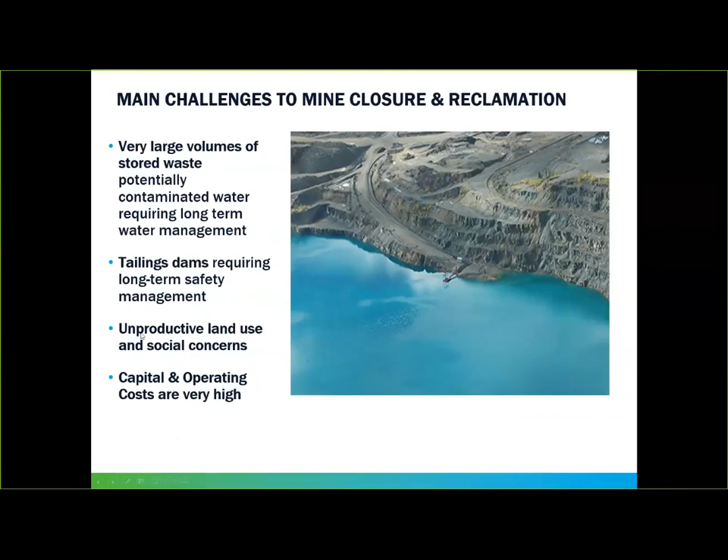As an example of such challenges is the Faro mine in the Yukon Territory in Canada, which Jamie Kars will speak to. It's a large mine built and managed in the standard of the 80s, which produced lead and zinc. It was not built for closure, and now many upgrades are needed to all the mine infrastructure, including upgrading the tailings dams, diversions to meet seismic and hydraulic standards.

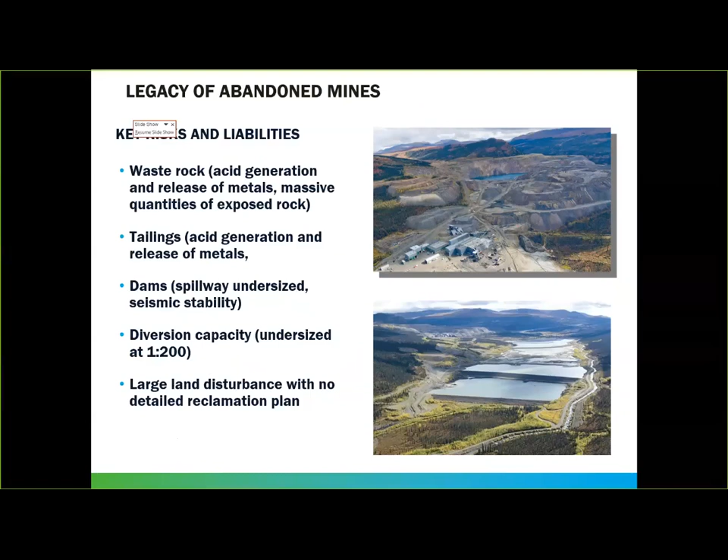And the tailings and waste rock that generate tremendous contamination in the water courses. The mined-out pit walls are unstable, and combined with the waste rock, the tailings areas take up an extensive part of the land area and valleys.

So recently, there's been some effort to provide guidance for the management of mine closure for industry and governments. Most significantly, the International Council on Mining and Metals, ICMM, which is a mining industry association, has generated useful guidelines and tools to support proper closure, including best practices in stakeholder engagement and social closure.

The International Standards Organization, ISO, is nearing completion of the Mine Closure and Reclamation Planning Standard and has accompanying technical guideline manual to support that standard.

The International Committee on Large Dams, ICOLD, and the Canadian Dam Association, CDA, are excellent tools for designing and managing dam safety and are internationally recognized standards. They provide hydraulic and seismic design guidelines based on risk to population, the environment, and critical infrastructure.

The common theme for proper mine closure starts with the main objectives that are set for the project, which would lead to the development of specific criteria in assessing and remediating for physical and chemical stability, as well as post-mining land use. These objectives typically involve the notion that public should always be safe from physical hazards on-site, including dams, slopes, mine openings, and other infrastructure.

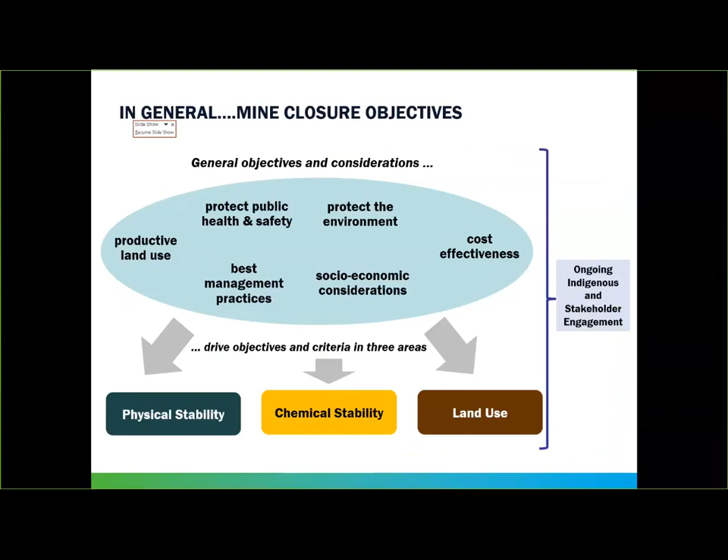Commonly, it is expected that after the completion of the closure project, most of the land should be left in a form which permits future uses such as wildlife, farming, recreational, or industrial development. The formation and buy-in to these objectives needs to be done with stakeholders and right holders to ensure success.

I will talk briefly about the key physical risks that are the drivers for safety and environmental concerns. Tailings ponds are structurally the most significant risk. Many were built before real design standards were developed or were built with the mine operations design life as compared to a closure design life.

Design considerations include maximum seismic stability, which would provide robust design requirements. Spillways need to be able to pass anticipated maximum predicted flows. Diversions need to be designed to pass those same flows. Stability of underground working, stopes, adits, shafts, and portals and pit walls are a significant safety and land use concern.

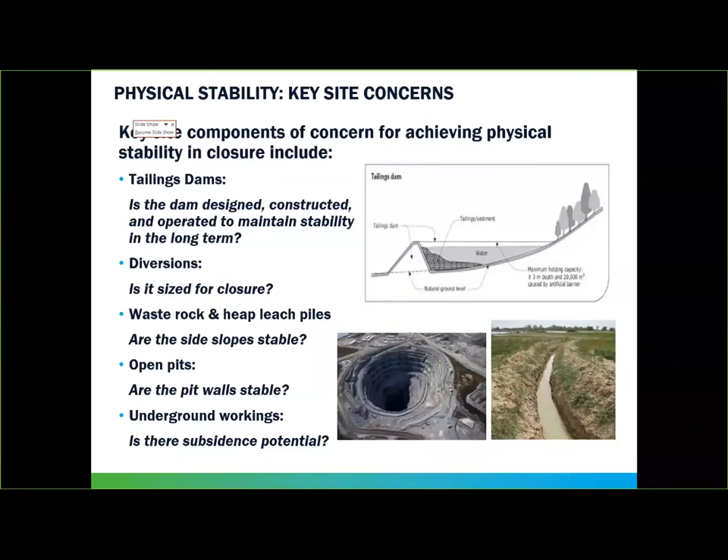Another quick word on tailings dams. Many dams have been and continue to be built on tailings as foundation, primarily due to lower construction costs and lower impact on operation schedule. The standard on this is changing, however, in favor of more stable and robust design approaches, such as centerline or downstream construction lifts. This can be a major cost item.

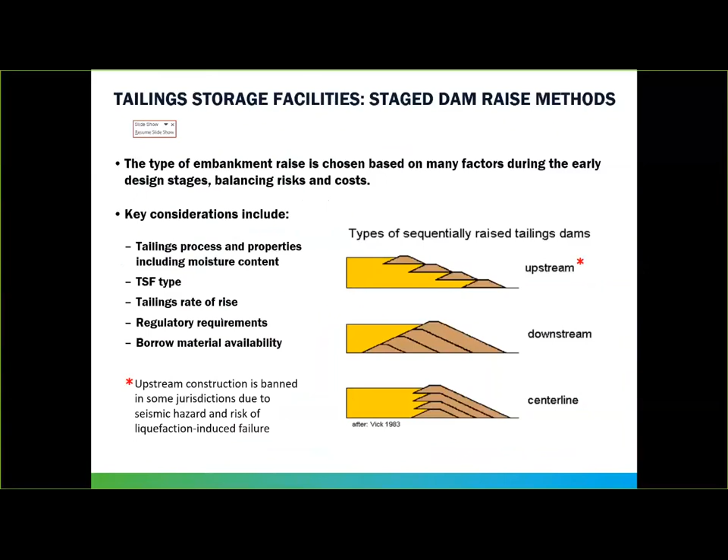If upgrading is needed, in some cases, construction modifications, a change in operational requirements, or monitoring improvements can be efficiently brought to bear.

We also need to consider designing to account for extreme events such as floods, earthquakes, as well as perpetual disruptive forces such as erosion and water infiltration that mine waste structures are subjected to. One of the big questions in the mine closure world is design life.

Do you invest heavy in CapEx to design against all sorts of high consequence, low probability events? Or do you take the approach of lower CapEx with higher OpEx and hope that the OpEx reduces over time as technology improves? In some cases, the answer is already provided by jurisdictions as they standardize design requirements, but in many jurisdictions, this is left up to the owner as a financial decision, provided that they meet environmental regulations.

Due to the durability of engineered structures and strengths of materials, it's hard to design for more than a period of approximately 100 years, certainly when you think about what we knew 100 years ago. We can, however, use projections, for example, based on the estimates of precipitation return periods to design for reasonably long periods, say up to 1,000 years, or even maximum precipitation estimates, essentially arrived at by extrapolating from what we know has occurred.

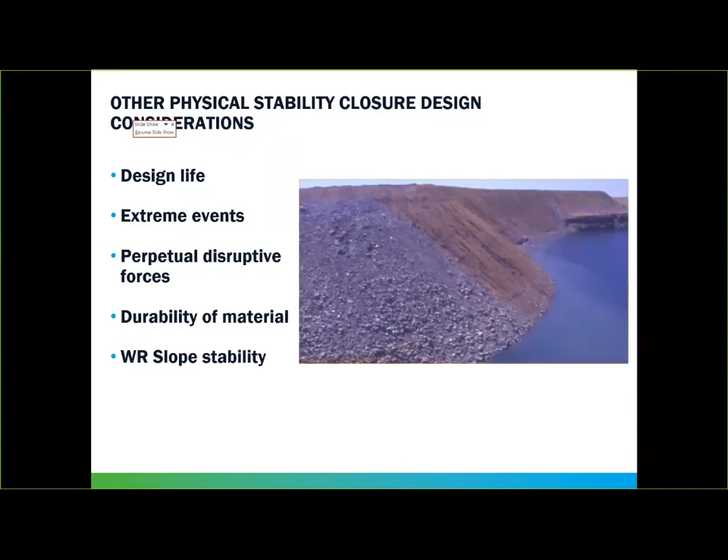There's obvious uncertainty in this approach as it is based on predictions. However, it is based on current science and updated regularly. So adaptive management is required, which I'll speak to later.

To look at chemical concerns related to mine closure, you must look at the process waste streams, as well as environmental processes that impact valuable water resources. Process contaminants of concerns include mostly cyanide used for metals leaching, and mercury for old mines used to form amalgams.

Acidification is common in pyritic host rock when crushed into sand-sized particles and then exposed to oxygen and water. This condition, however, can be a sleeper when the acid potential is greater than the neutralizing potential for many carbonates in the rock. Once the neutralizing potential is gone, the acids thus create a major challenge in future years.

There are various tests that are available to determine this potential, and are used to base design decisions such as waste cover thicknesses, as well as source terms for water treatment if required.

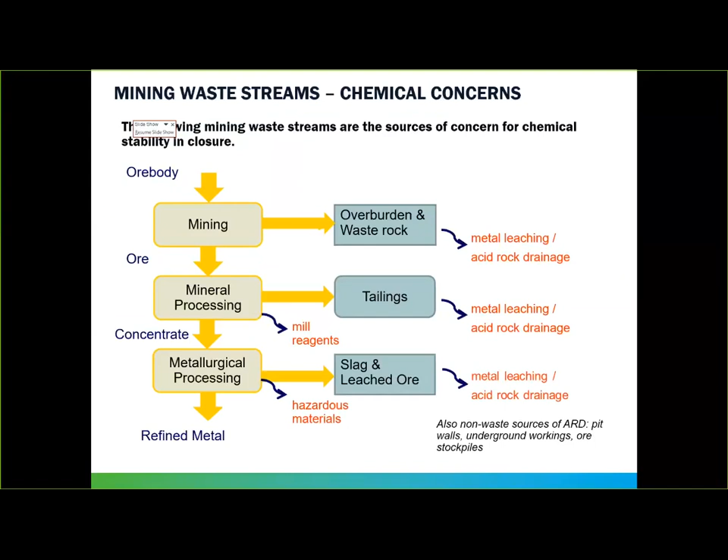The holy grail, however, is to avoid long-term water treatment by getting ahead of it if possible and reducing the requirement for it otherwise. There are different processes to control reactions based on where you are in mine life. Addressing it earlier, of course, is better to be able to control the reactions.

For example, covers are used to limit oxygen or water. Adding lime into the processed waste stream is another. Moreover, waste covers slow the reactions down in order to reduce any potential impacts to tolerable levels. Clean water diversions are used to separate fresh water from contaminants, eliminating or reducing the water treatment burden. And if you lose the battle, you'll need to treat until the reactions have been exhausted. The use of wetlands is an excellent way to reduce these costs by using natural systems of metals absorption.

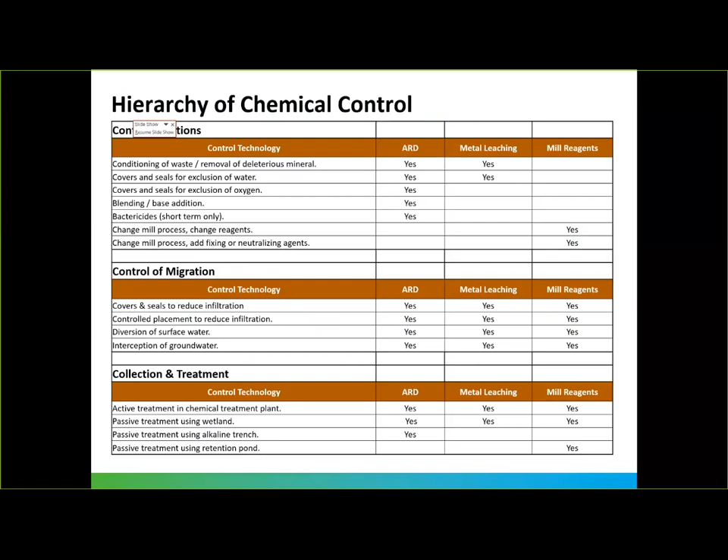A very challenging part of mine closure is to manage the expectations of what the post-mining land use will be, as there will indeed be limitations. This is also the part of the closure work that stakeholders see and feel that they have control over, so it tends to attract a lot of attention.

There are limitations to what you can do with large open pits, tailing storage facilities, and waste rock piles. There are creative ideas for large open pits, such as turning them into lakes and to be used as municipal landfills, for example. Tailings sometimes can be reprocessed for more value extraction or used as a sand-like product for construction.

For mines close to communities, waste piles can be turned into flat sports surfaces for soccer or other sports. The best case scenario is when you get the community involved to maintain the site for those recreational uses. This supports community buy-in and ownership.

Another important consideration is to design the waste topography to match surrounding landforms. It will support natural drainage and vegetation and thus require much less maintenance.

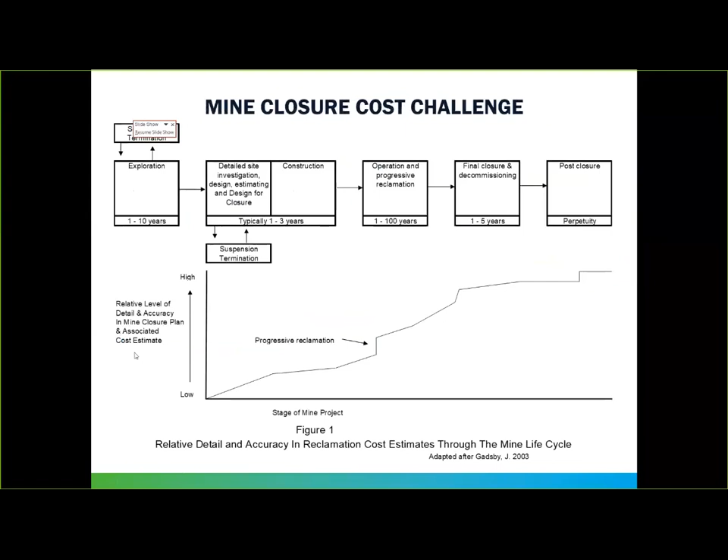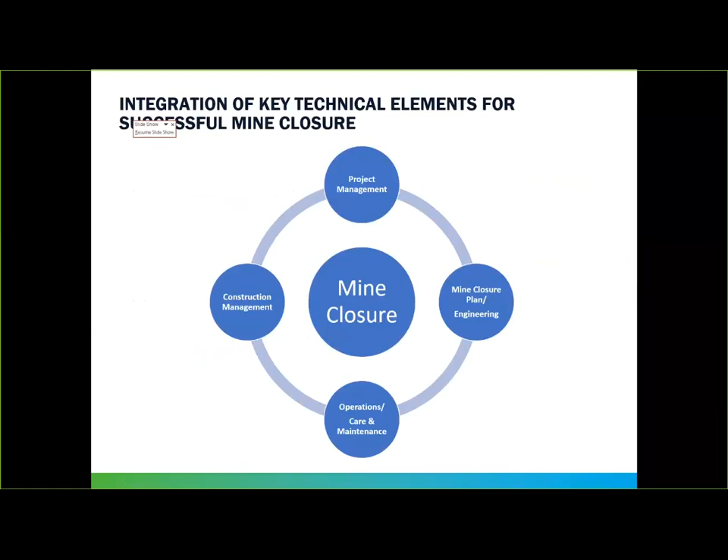So we find that the mine closure process requires the integration of planning and engineering with operations and construction management, all housed under competent project management, with the knowledge and skills to control all aspects of the job. Integration is required to have better alignment between these components so that it is possible to come out with an optimum solution that is cost effective.

In developing the closure plan scope, the initial steps are to conduct the assessment and develop the conceptual site model. The challenge at this stage is to avoid turning every aspect of the assessment into a science experiment.

Then going through an options analysis backed up by a multiple accounts analysis, comparing the performance against objectives. This requires a good cost estimate to ensure that the selected option is not unaffordable, thus necessitating a relook at the project objectives to see if they're achievable, and potentially requiring more assessment work.

Looking at different failure modes will improve the design for robustness, as well as performing constructability assessments to ensure that you can build the project as planned, potentially exposing hidden costs that are much better to know ahead of the construction work. Developing a well thought through adaptive management plan that addresses concerns in a systematic way will save from over-designing the project for risks that may never appear, avoiding unnecessary costs.

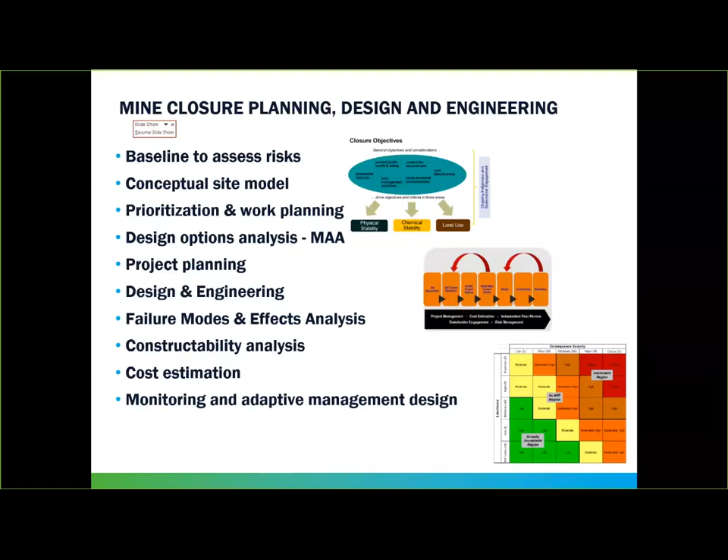As stated, project management is critical to the success of the project, incorporating the planning and design elements with construction management along with care and maintenance requirements. Cost and schedule control is key to project success as there are multitudes of sub-projects. There are so many sub-project dependencies that if one of them is well off track, it will push the project critical path and increase costs.

On behalf of the owner, Parsons typically does the procurement and manages all the subcontracts in order to have good schedule and cost control.

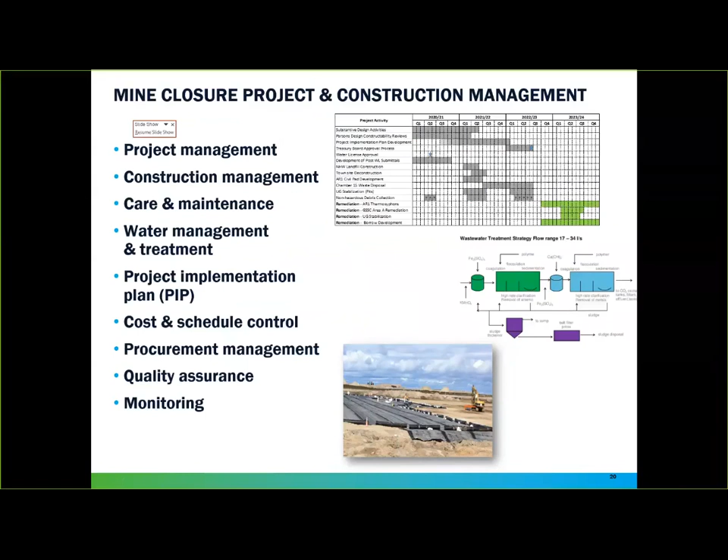Yeah, well, thanks, Mike. Good morning. As Scott noted earlier, I've been with Parsons for more than 30 years, and in that time I've been fortunate to pursue interesting work in the Arctic.

In 2012, we identified an increase in activity at abandoned mines located in northern Canada. Many of these mines are the responsibility of the federal government, who, after years of assessment, had finally decided to undertake risk reduction projects under what they call urgent work programs.

The first of the projects we carried out at these mines was the deconstruction of the roaster complex at Giant Mine, which started in 2013. We were then awarded additional work at Giant Mine to do what they call interim construction management, which is the construction management of a number of discrete urgent work projects.

In 2016, we were awarded a contract to manage care and maintenance of the Faro Mine at Faro, Yukon. Then back to Giant Mine in 2017, we received a contract to do the construction management of the remediation, which will hopefully see the closure of the mine site over the next 12 to 15 years. And in 2018, back at Faro, we won another contract to do the construction management work for the implementation of some urgent works at that site.

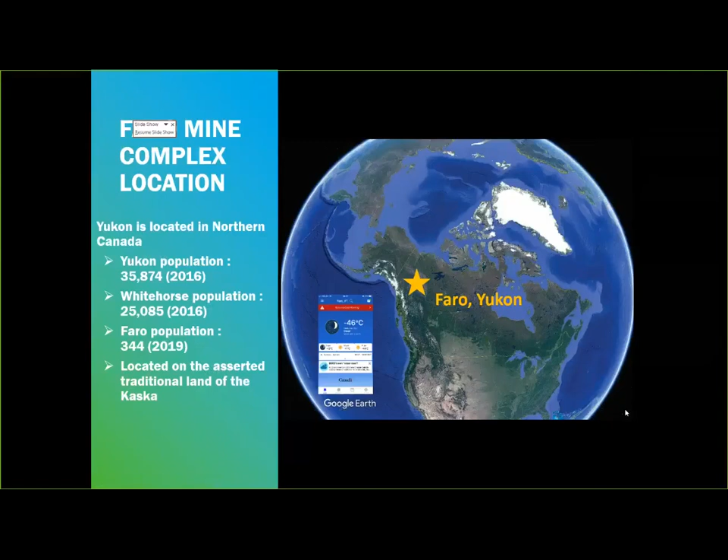Parsons' role at the site is largely care and maintenance. The mine was abandoned in 1998 and has been in care and maintenance ever since. We're the fourth contractor to have this role.

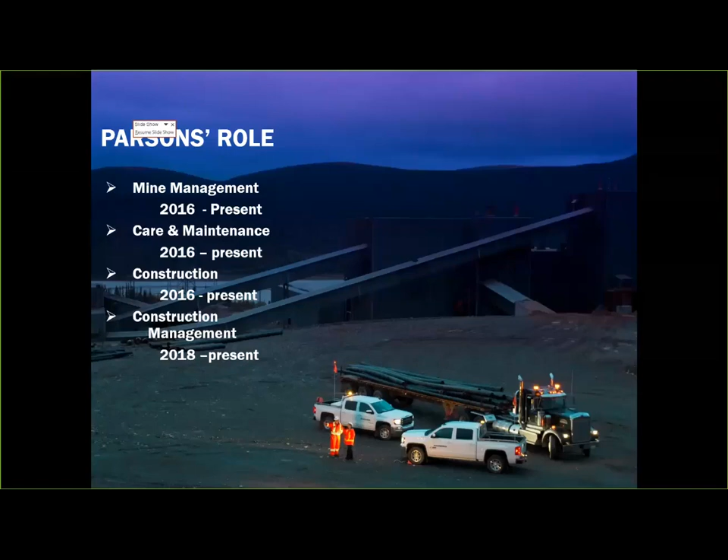The work that we undertake includes monitoring environmental quality, managing clean water diversions, collecting and treating contaminated water, and ensuring that the water leaving the site meets all environmental standards. We also maintain site infrastructure including roads, bridges, buildings, dams, dikes, and stream channels. And as I noted earlier, in 2018 we also started doing construction management for some of the urgent works projects.

Faro Mine was once the world's largest open lead zinc mine, located in an area referred to by the Kaska as Sidzul, which they call the Mountain of Plenty, well known for its abundant wildlife. There's a lot of First Nation activity in the area, primarily focused around sustenance hunting.

The mine itself, or really the discovery, was found in the mid-1950s by some First Nation people who showed it to some prospectors, and afterwards it went into development. It was actually constructed by Parsons in the 1960s and operated until the late 90s. It's been in care and maintenance mode ever since as remediation plans are developed.

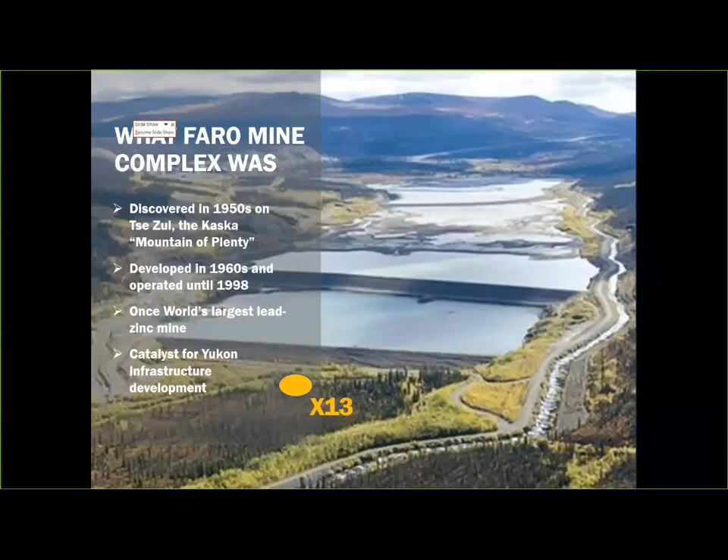Prominent features in the photo include the 4-kilometer-long tailings basin and its ponds located in the center of the photo, the Rose Creek diversion on the right side of the tailings ponds, and the large pond at the front of the slide called the Cross Valley Pond, which is the polishing pond used to store treated water on site before it's discharged to the environment. I want to point out X13 down at the bottom, because we'll be talking about it on the next slide, what the Faro Mine Complex is today.

It is probably the most complex abandoned mine site in Canada. We're doing risk mitigation work at the site to ensure it remains stable and secure, coupled with environmental monitoring that ensures the systems are working as designed, so we can minimize environmental health and safety issues.

The realignment of the North Fork of Rose Creek is an urgent work project currently underway to prevent the creek from coming into contact with contaminated water. I wanted to point out the Cross Valley Pond, the lower pond in the photo, that it was blue for decades until 2016, and it's reddy brown today, demonstrating just how site water quality is under constant threat. The water in that pond could be directly discharged to the environment 4 years ago, and now it requires treatment prior to discharge. In the foreground is the area of X13, which we'll talk about on the next slide.

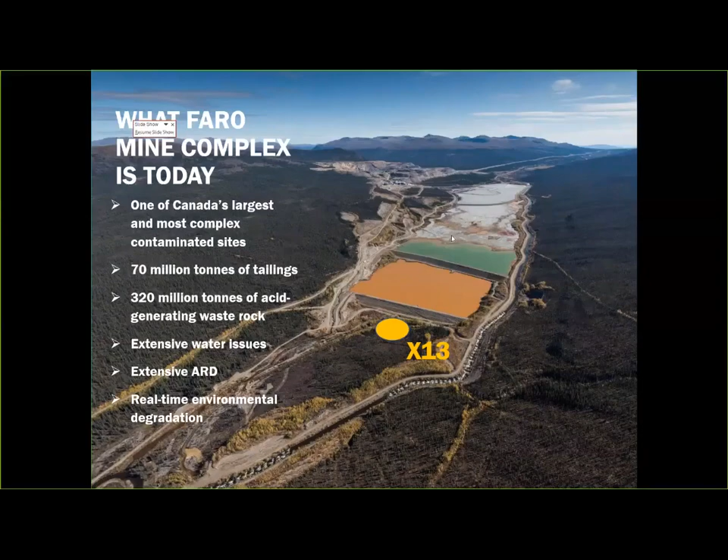In 2017, the X13 area was a fairly quiet woodland. We had a weir in there and did frequent sampling, as this was the down valley part of the tailings basin, and we needed to confirm water quality before it left the site.

By May of 2018, upwelling impacted water from the tailings basin had resulted in degradation of the X13 water quality, and a capture conveyance system had to be designed, constructed, and placed into operation. Water from the X13 area is now pumped to the tailings basin and into the Faro pit for eventual treatment.

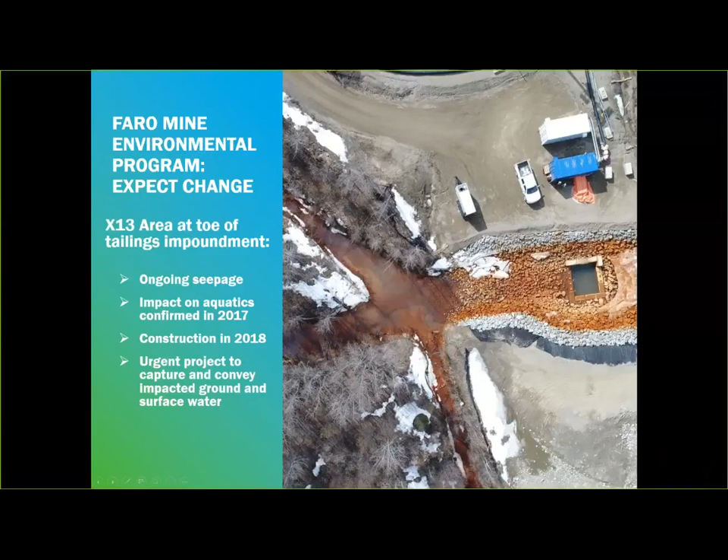The project to capture and convey this water from the down valley area included the installation of 1,500 pumping horsepower and over 7 kilometers of insulated HDPE pipe.

The Faro pit is the largest pit. It's approximately 100 meters deep, and it contains a mixture of groundwater and surface water recovered from elsewhere on the site.

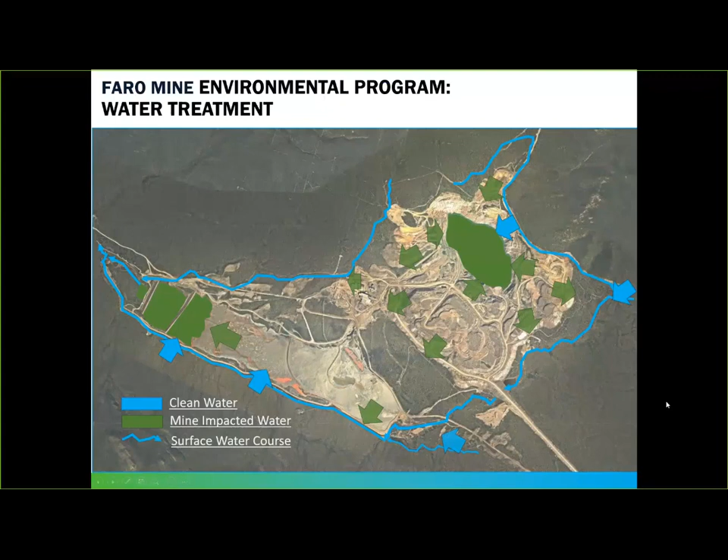I want to point out how the creek runs down toward the bottom of the slide, then goes through a rock fill, and then comes out.

I wanted to show the general movement of water on the site while we've got the water capture and treatment in operation. The green arrows show the direction of contaminated water as we pump it up to the Faro pit, where we collect it, then run it into what we call the interim water treatment plant, the IWTP, and do a direct discharge to the environment.

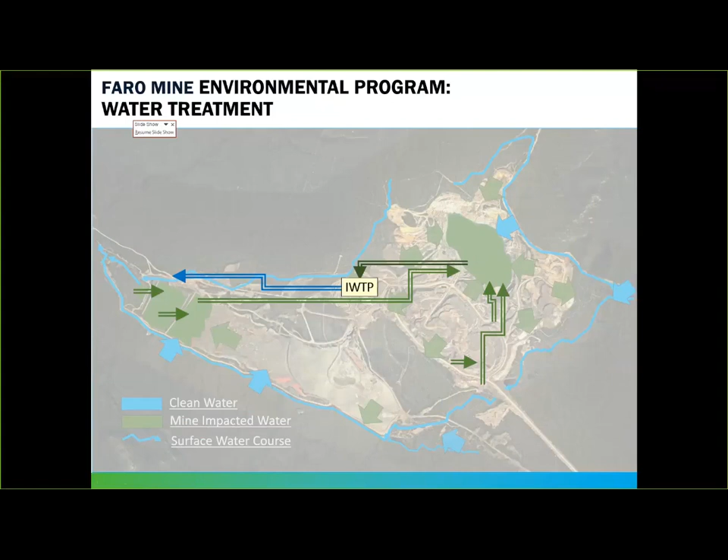We've got 2 water treatment plants working at Faro right now, and we're working on a third. The top photo is the interim water treatment plant, constructed in 2014. It has a flow rate of about 6,000 gallons a minute, processing over 1.4 billion gallons annually. It's a seasonal operation that runs from spring until about November.

We have the Van Gorda water treatment plant, a legacy plant built by the mine operators and constructed in '92. It's got a 2,000 gallon a minute flow capacity, and we treat almost half a billion gallons there annually. It has a shorter operational season, running from about May until September.

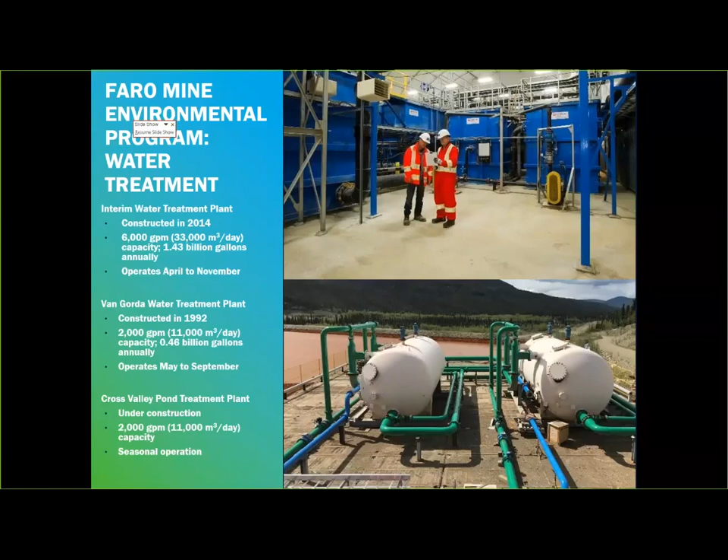The photo at the bottom is the Cross Valley Pond Treatment Plant. It's presently under construction, will have a 2,000 gallon a minute operation, and will be seasonal as well. This is the plant that Les will be talking about in a few minutes.

When you're in remote areas with small populations, it can be really challenging to staff projects and carry out work, and I wanted to recognize the people that make it work for us. Faro's got a population of 344 people, and many of them work for Parsons. Our seasonal workforce reaches up to 50 or 60 people, and we have to do all services at site, manage the site, and provide trades for various maintenance operations. We have water plant operators, equipment operators, environmental techs, full-time chemists, site security, and we have to do all of our own emergency responding.

Most of the activities we've talked about so far are about treating contaminated water. We've also done projects to keep the clean water clean. This is a photo of construction work we're finishing up right now, the culmination of nearly 2 years of construction in ice-rich permafrost to build the diversion of the North Fork of Rose Creek.

On the upper right of the photo, you can see a bit of a rock fill that used to extend across the creek valley. We removed about 700,000 cubic meters of rock and constructed this new diversion channel for Rose Creek that runs through where the rock fill used to exist. This project is scheduled for completion in mid-October and will be the first significant urgent work project completed at Faro.

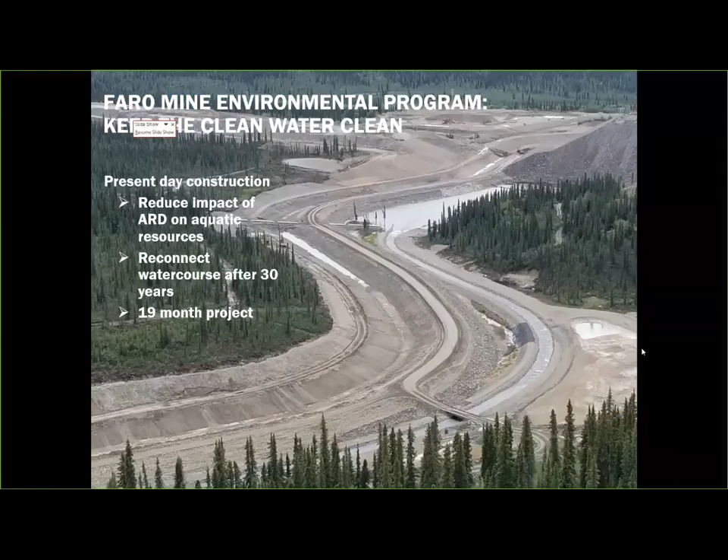Okay, I wanted to talk about Giant Mine for a few minutes now. Giant Mine was in fact, probably still is, a large underground gold mine located in Yellowknife, Northwest Territories. Mining operations ceased in about 1998 when it went into care and maintenance mode, same year as Faro did.

Giant Mine had started operation in the mid-40s. It was sidelined for a bit because of World War II, but it went into operation in 1948. Between 1948 and 1998, it produced over 7 million ounces of gold. Since 1998, it's been under a care and maintenance program administered by the federal government. Parsons has been active at the site since 2013.

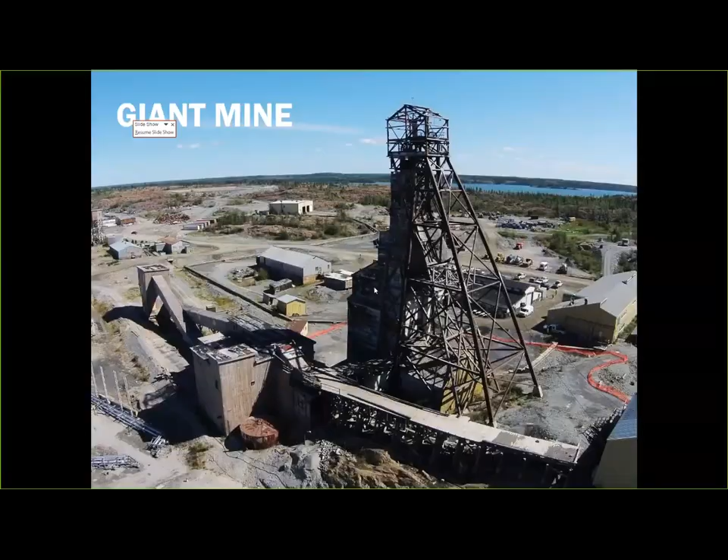As at Faro, at Giant Mine we've had a number of different roles on site. We were doing construction there for a few years. We've done construction management for 3 years. We've been the mine manager since 2018. We're also doing care and maintenance since 2018. And we also have been awarded the contract to oversee the remediation of the mine over the next several years. That will probably go up to about 2030.

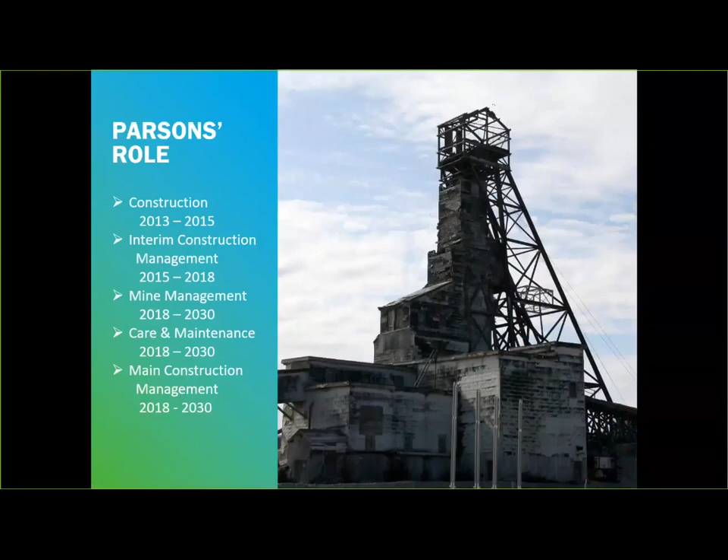The problem at Giant is arsenic trioxide. The bedrock in the Yellowknife area, including the Giant Mine site, contains arsenopyrite. This naturally occurring mineral is composed of iron, sulfur, and arsenic. The arsenic trioxide waste was created during mining operations. When the ore was roasted to release the gold, arsenic was released as a gas. As the gas cooled, the arsenic changed to a solid state and became toxic arsenic trioxide dust.

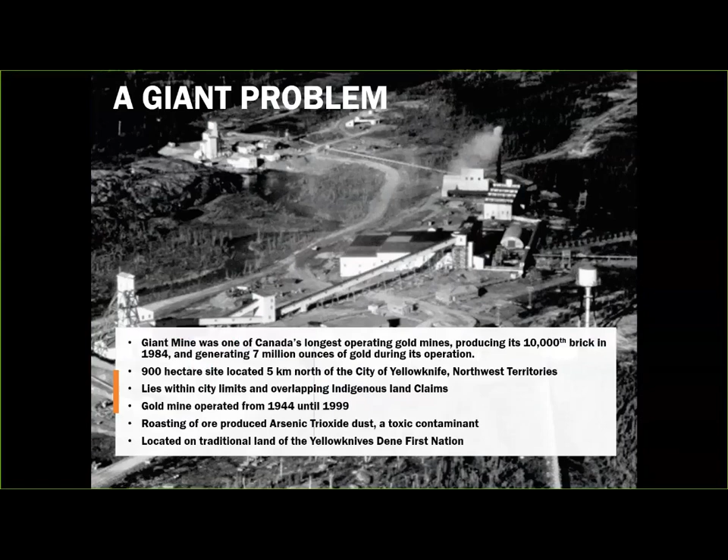The roaster, as the complex was called, was comprised of 9 buildings and the large smokestack. In 2013, 2014, and 2015, Parsons decontaminated and deconstructed that entire roaster complex. That activity produced more than 10,000 cubic meters of arsenic and asbestos waste that's presently stored on site in storage containers.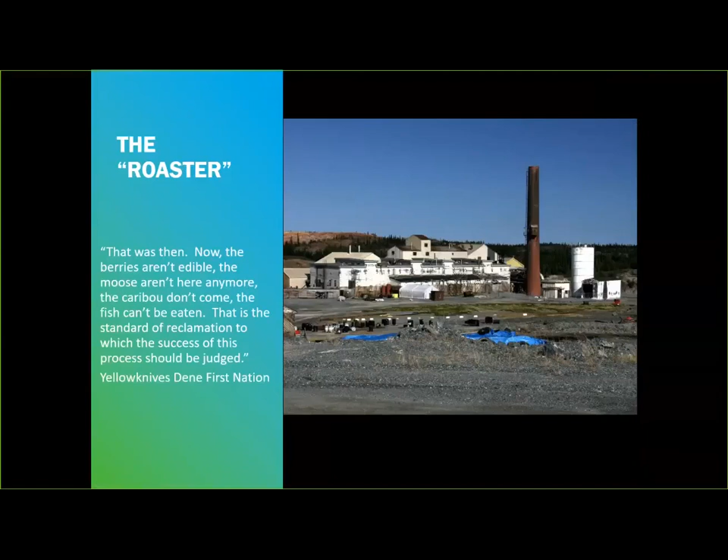Once they started putting the arsenic dust underground, they pumped it into 11 chambers and 5 mined-out stopes that were built for storing the arsenic waste. Right now those stopes store approximately 237,000 tons of arsenic trioxide waste. The chambers and stopes are surrounded by solid rock, between depths of about 80 and 250 feet below surface.

This model of the largest arsenic stope is compared to the 10-story building beside it, and it shows not only the size of the feature, but also the complexity, with all of the different drifts and access points and things going into those stopes. The present plan is to take advantage of the subarctic climate and freeze that arsenic in place.

Parsons had a number of projects there. In addition to the roaster deconstruction, we've demolished several of the buildings, including what they call the C shaft and the H shaft. We've done projects to stabilize various features on site, and we've also installed underground communications. At present, we're beginning the implementation of the remediation plan.

Now I want to turn the presentation over to Les, who's going to take us back to Faro and discuss the design of the water treatment plant presently under construction.

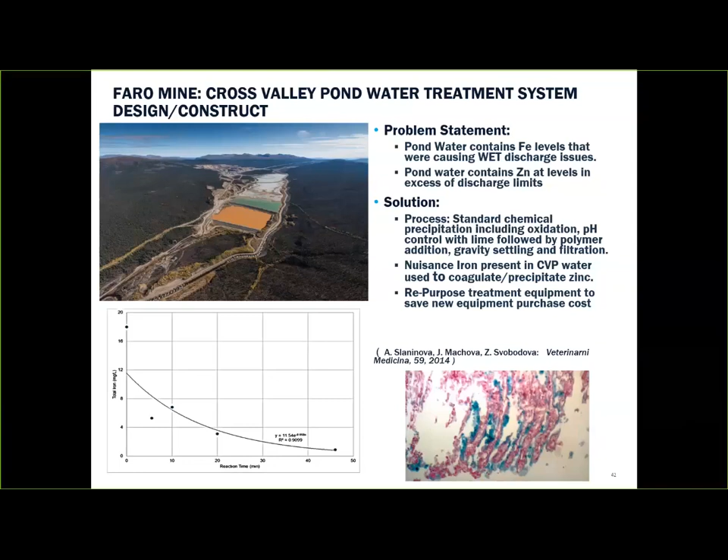The treatment system I'm going to show you here - you can go to the next slide. This is just a brief PFD, a really simple metals precipitation type treatment system. We are repurposing 80% of the equipment used in this.

We're reusing equipment that we were able to source from down in the States at another location that had only been in operation for 5 years, and now it's up at site. I'll show you a photo of where we're at right now.

We're going to add lime in that tank also, and we're also adding polymer in that tank to get coagulation and precipitation of iron. In this case, the presence of the iron helps us because we need the iron to coagulate and flocculate the zinc and precipitate the zinc out. If we didn't have the iron there, we'd have to add a metal salt, either iron or aluminum. So the iron in this case is kind of a double-edged sword.

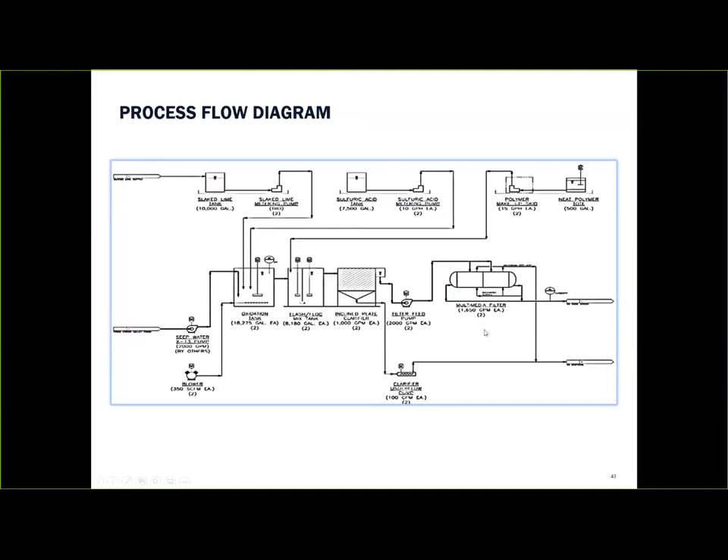We also have the ability to recirculate that back to Cross Valley Pond. It could ultimately go back up to the pit if we ran into problems, et cetera. So that's the treatment process.